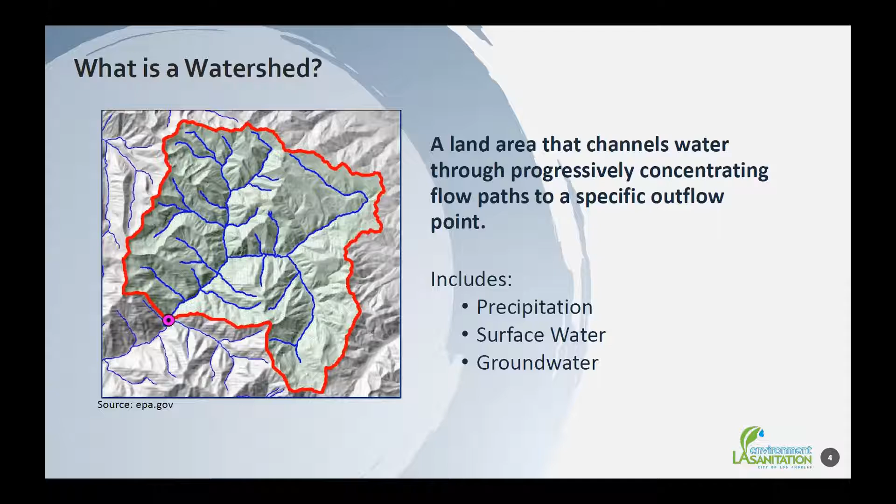Great. So just to take a step back a little bit, since we're talking about watersheds a lot today, I just want to define what a watershed is, just so we're all on the same page. Essentially, it's a land area where all the water within a boundary flows into a final discharge or outflow point, as you see the pink dot on this map. It includes these three components listed here. And this map has actually more rural watershed, where you can pretty easily delineate the boundaries just by looking at the valleys and peaks of the topography. Next slide, please.

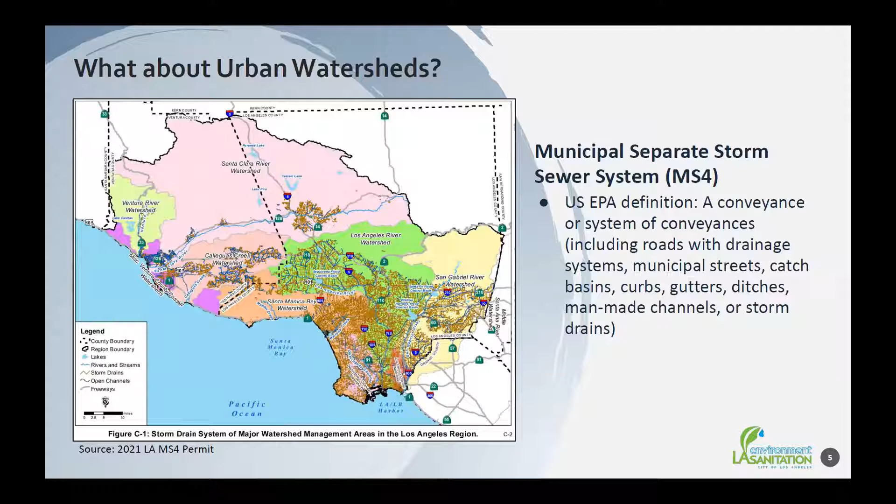So we live in a more urban environment, right? What about urban watersheds? Typically, these are more constructed or engineered conveyances, like a storm drain system, rather than those more natural channels in mountain regions. This is our first key term that's so very widely used in our field, the municipal separate storm sewer system. That's quite a mouthful, and it comes up all the time, so we shorten it to MS4. And the MS4 is essentially a system of conveyances that include all the components listed there to channel stormwater into its final destination. That could be a lake, a river, ocean, into the ground, or even potentially a treatment plant. Next slide.

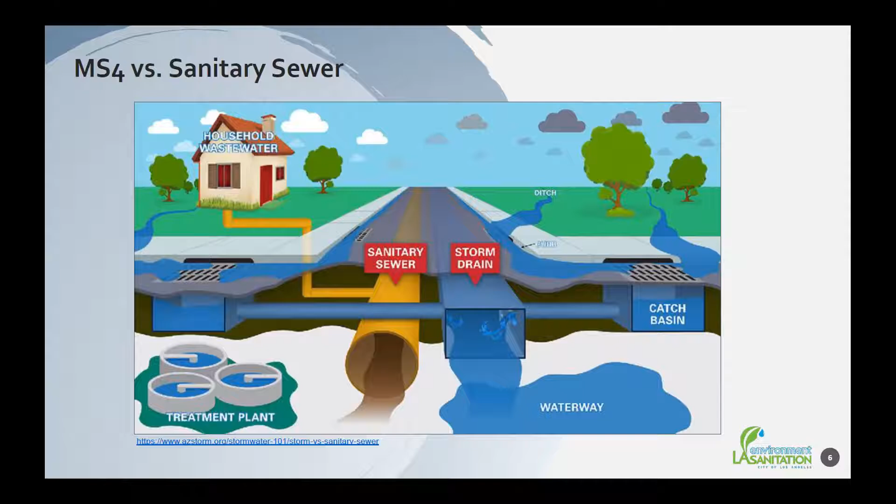So I want to make this distinction between what the MS4 and what the sanitary sewer is. In newer cities, they've actually constructed separate conveyances for wastewater, like what comes from your toilets and your sinks. And there's a separation between that and pure stormwater. And this is important because if you have a combined sewer and storm drain system like in older cities, then it could potentially overwhelm downstream treatment plants when it rains and require discharge of that raw wastewater and stormwater mixture into a water body. So nowadays we separate these to prevent that from happening. A lot of our storm drain systems lead directly into the ocean, and that's why we need to carefully assess pollution in our MS4 and figure out what we can do to reduce it. Next slide.

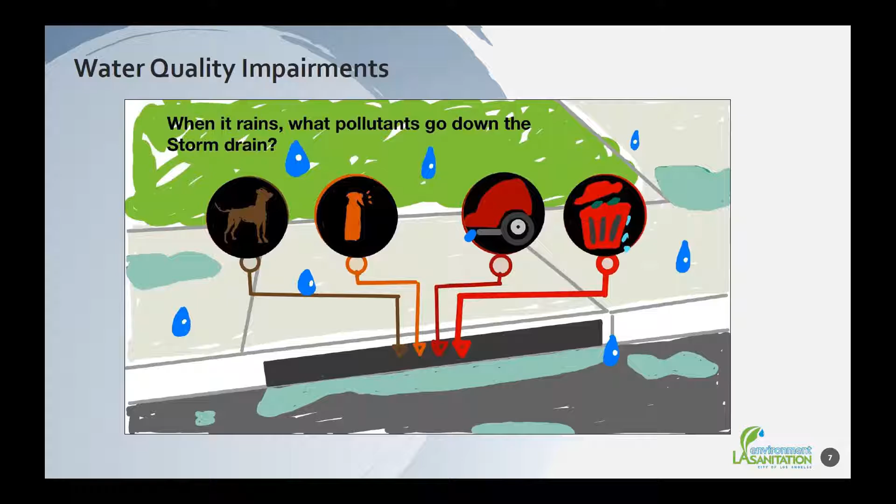Cars, as I'm sure you're all aware, produce a lot of pollutants, such as combustion products that can be deposited onto roadways. Leaking oil is a problem. Zinc comes from tire wear, copper comes from brake pads. And lastly, trash is one of the first pollutants to be regulated closely, and that drove a lot of the water quality regulations for these other pollutants. Next slide.

So now let's talk about the regulations, since they're very important. They govern everything we do here. Some of you may have heard of the Clean Water Act. This is a federal law that governs surface water quality all across the US. The Clean Water Act allows states to enforce regulations, and one of the tools they use to enforce is called the National Pollutant Discharge Elimination System Permit, or NPDES, another long acronym, comes up all the time.

These permits are issued to anyone who wants to discharge water into a water body, and they always come with limits on the discharge amount and limits on pollutants. So the city is subject to one for its MS4 because the MS4 is within our jurisdiction. So we're responsible for meeting those water quality limits. My division's main focus is to comply with this permit, and it's quite a doozy. It's over 800 pages long.

Unfortunately, it's not as fun to read as the latest George R. R. Martin novel, but we have an electronic copy that we can search for the specific sections we need to reference. And we're currently working to implement new permit requirements that came out last year. Next slide.

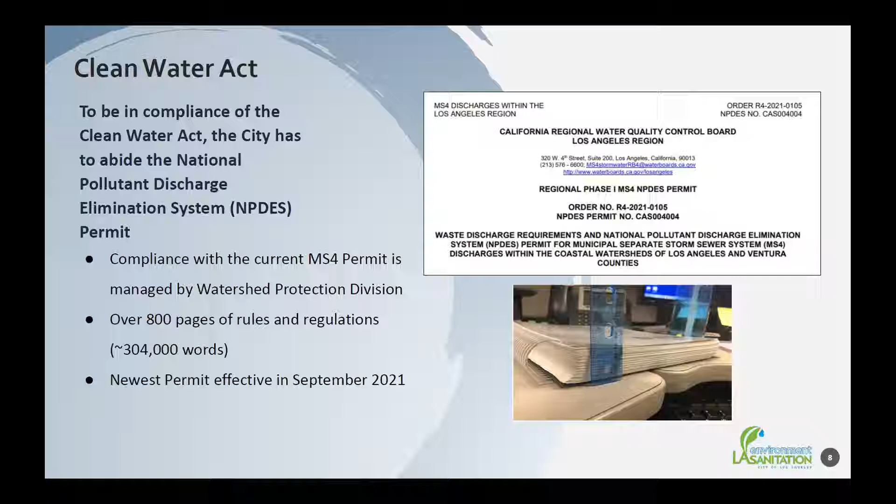So just a little bit of the benefits or the functions of my division. Overall, our goal is to protect the beneficial uses of the receiving waters in the cities, lakes, rivers, and beaches. So we do this by improving water quality, capturing rainwater for other uses like irrigation, non-potable, non-drinking water uses, recharging groundwater. Since a good amount of our drinking water comes from groundwater, it's important to keep our aquifers at a fairly constant volume. Reducing flooding is a big one, since protecting public safety and property is always your #1 priority as an engineer. Enhancing wildlife and providing open spaces for habitats is key.

When we build our cities, we want to think green and reduce impermeable surfaces like roads, parking lots, and rooftops. A lot of our projects are also called multi-benefit, since they improve community aspects like designing new parks while also reducing pollutants in our watersheds. So using this approach, it could be a win-win for our community and for our regulatory requirements. Next slide.

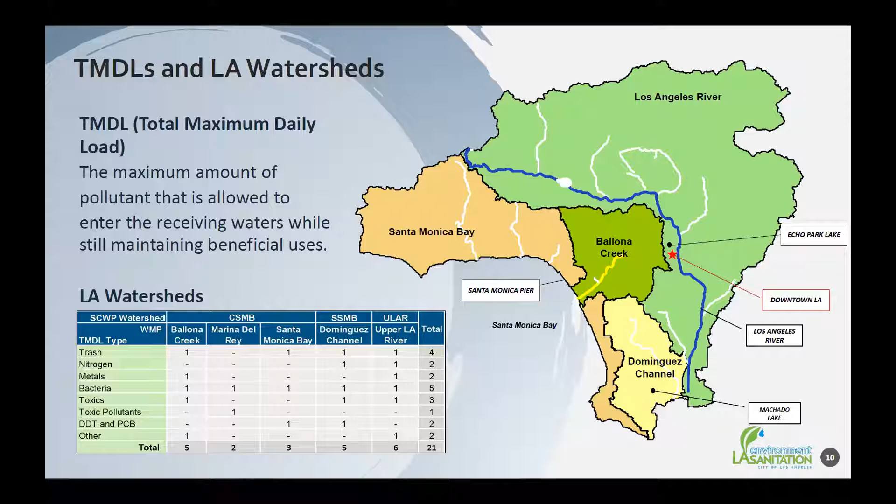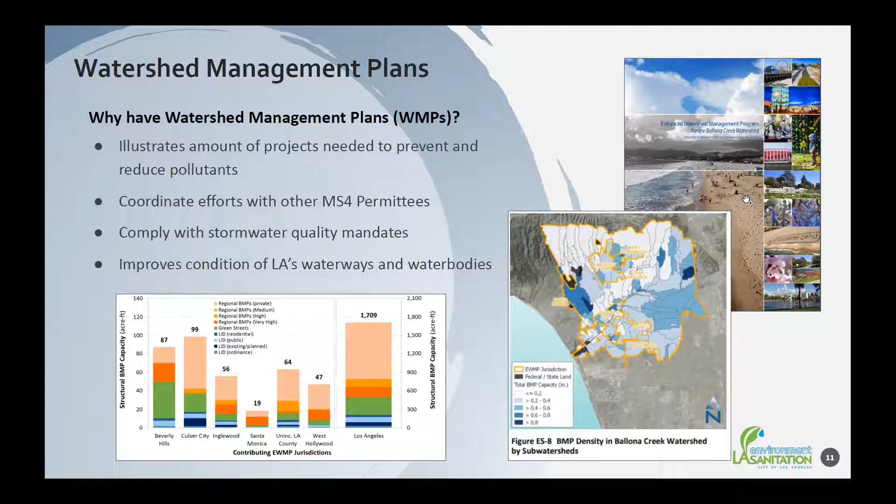Since there's a lot of different cities in each watershed boundary, as you can imagine, we have these plans in place to coordinate efforts with other cities and agencies, since they're also on the hook to comply with the MS4 permit. We typically pool funding and resources from these other cities to work on these projects. For instance, one of my main roles is to lead a watershed management group for the Santa Monica Bay watershed. We're made up of several different cities and LA County as well, and we have a well-rounded team that works together on compliance efforts. Next slide.

So just a high-level breakdown of the strategies we use to comply with these regulations. It starts with coordination and integration, working with many different groups like other agencies, NGOs, which is non-governmental organizations, as well as community organizations. And this includes looking for different funding sources, planning projects in the initial stages. And when we actually build or implement projects, they're classified in different levels, starting with the smallest parcel level. And the biggest level would be the watershed level, which is designed to collect runoff from a much larger area

for treatment. We work very closely with Brett's division in this process, Safe Clean Water implementation, to actually build and implement these projects. And then there's that multi-benefit aspect that I mentioned that is used to improve water quality supply as well as benefiting our communities. Next slide.

So low impact development, just wanted to touch on this a bit since it's another good solid strategy that the city uses to improve stormwater quality and reduce runoff volumes post-development. So when a developer wants to build something new in the city, they need to create an LID plan that shows how they're managing the stormwater runoff on that new property. And our engineers will review that against the city's ordinances and MS4 permit requirements. So if you're the kind of engineer that enjoys checking plans, this would be a very good fit for you.

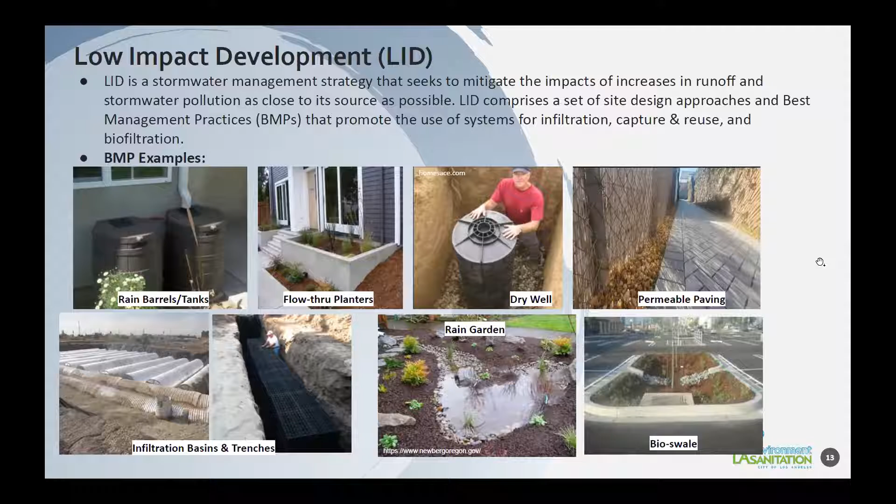So just a little bit more about the sections in my division that support all the work that we do, starting with pollution assessment. This is the section I've mostly been involved with during my city tenure. Our objective is to monitor all the city's watersheds that I showed earlier. So we measure pollutant concentrations, flow rates, and other parameters in the MS4 to build robust data sets and check the health of our watersheds.

Next, we have enforcement, and these are mostly comprised of inspection officers and law enforcement officers that investigate potential environmental crimes. So a lot of the times, if we see any illegal dumping of trash or other chemicals like paint, oil, et cetera, into the MS4, the first thing we would do is notify them, and then they would go pursue any potential investigation and do source tracking as well of some sort of pollution.

Last but not least is our public education section, and their job is to teach residents about living more sustainably. Since everyone lives in a watershed, we're all responsible for doing our part in protecting them. Next slide, please.

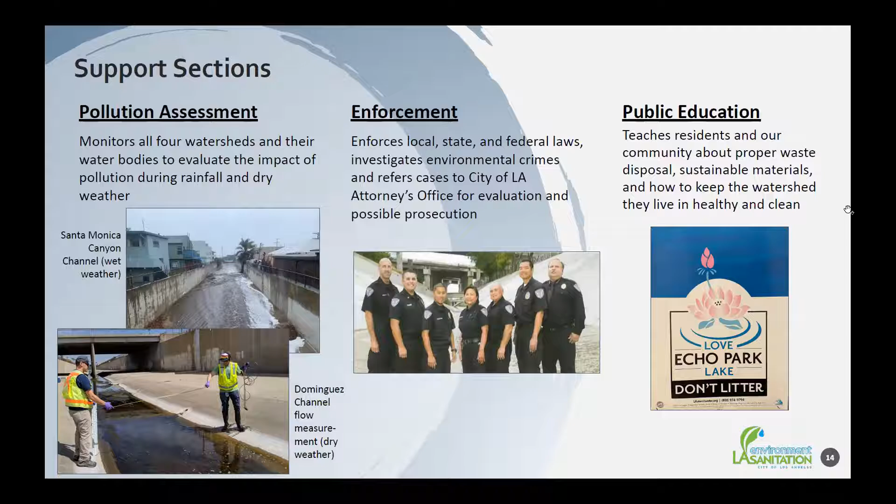Okay, the last thing I wanted to touch on briefly, if our work interests you, feel free to visit our website, lastormh2o.org. It's an easy to remember URL. We released this website this year in partnership with 28 other cities and agencies to raise public awareness about our work. So there you can find out more details about how we protect our watersheds, since this short presentation can't really cover everything, unfortunately.

So that's all for my division and my type of work, and I'll now hand it off to Brett to discuss his division.

Thank you, Richard. That's an awesome insight into your division and a great foundation of all of these different core concepts in watershed protection. So as we've said many times, I'm from the Safe Clean Water Implementation Division. It's actually LA Sanitation Environment's latest and newest division. Every one of our staff, at least the continuing staff, came from watershed protection. So we have all of the DNA that Richard just went through and brought that into our new division to meet our new goals. So let's go ahead and dive in and see what this new program is.

So I'm actually gonna tie back to what Richard was discussing. The Safe Clean Water Implementation Program and Division really are born from watershed protection, the MS4 permit, TMDLs, and the watershed management programs. So Richard has already discussed this, but we got our most recent MS4 permit in 2021. We are subject to 22 different TMDLs and are partners in 6 different watershed management program groups.

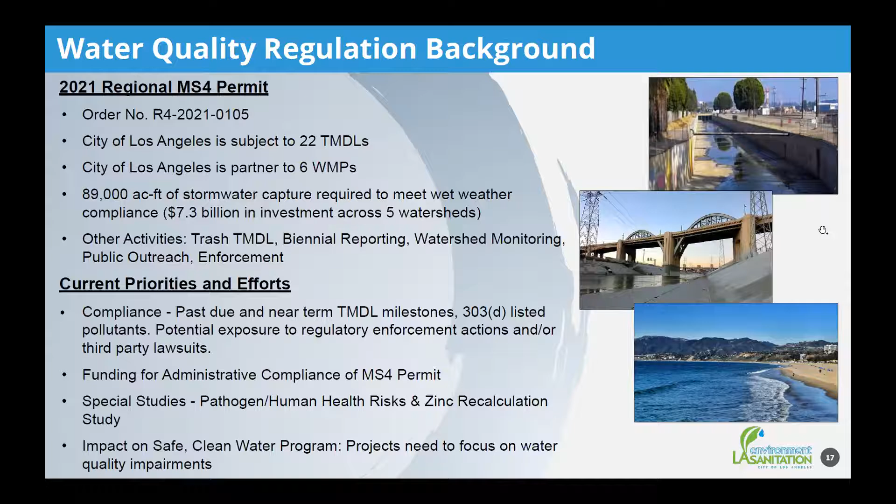And a lot of our work goes into prioritizing what areas and what projects deliver the most benefits that we can with the resources available to us. So we do steer the Safe Clean Water implementation program in order to meet the various priorities that are identified by Richard and his team. And there also are numerous different nuances that we're trying to meet, but we can now focus a little bit more on what the Safe Clean Water program itself is.

So it was advertised as Measure W, and it was approved by a general election in LA County in late 2018. It actually needed 2/3 approval to pass, and it exceeded that with 69% yes votes. That was a great vote of confidence from the residents of LA County and emphasis that this should be a priority for the region. And it then took about 6 months, half a year, for the LA County Board of Supervisors to officially approve the ordinance and all of the language and details of how this program would be rolled out and administered.

So our first tax collection was in fiscal year 19-20, and every single year throughout LA County, this program brings in about $300 million that goes to water quality and the additional water supply and community investment benefits that the program emphasizes. So that $300 million a year is split into a few different buckets, just because that's such a vast amount of money. The county flood control district actually keeps 10%, and that helps them run all the administration, reporting, tax collection, all of the behind the scenes support efforts.

And then in terms of the actual water quality benefits, 40% of the funds are returned throughout LA County to each individual city in which that tax was collected. So let's just say the city of Los Angeles contributed $1, we would get back 40 cents in a check. And that now has numerous different requirements and reporting mechanisms that we have to meet, but that is now money that should be put into water quality improvement projects.

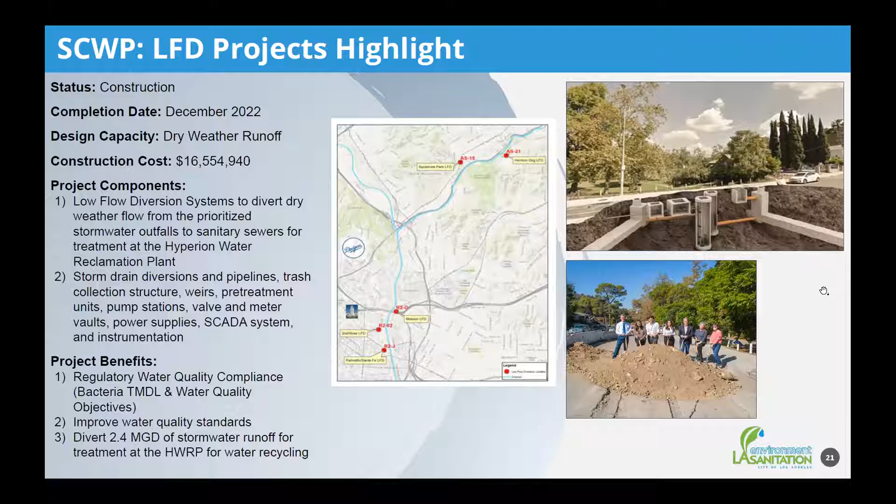And it also provides a new water supply. All that water goes to many of our reclamation plants, and by 2035, all of our reclamation plants should be at 100% water recycling. And so that is a new water supply that is extremely beneficial to the region, as I'm sure you've all heard of the mega drought and climate change moving forward.

So shifting gears, that was a highlight of our municipal program. Now I'd like to discuss our regional program a little bit. This is actually a program that's administered by LA County, and we're actually kind of considered an applicant in order to pursue these grant type funds. And so we basically spend about a year. Looking at the timeline from the left side, it takes about a year for us to develop the feasibility study, which is essentially our application for funding.

It would identify a project location, propose a certain scope, and then go through all the feasibility, what's already there, environmental permitting, and other considerations that are important before we go headlong into developing a project. It then goes through a series of different administrative and technical review steps that are led by the county. And you can see it takes all the way until the following July.

Let's say you apply in July of 2020. You then would get an answer whether or not you would be funded in July of 2021. So then it takes another year or so to get the project delivery mechanisms in place, and then you can truly start design and construction. So these do have long timelines.

But every project that is funded is vetted through a scoring review. This is a panel of technical experts from various backgrounds, and they review that your project will meet the water quality, water supply, community investment, nature-based solutions, community support, and leveraged funding goals that the program is emphasizing. You can get up to 110 points, and you need to receive at least 60 to be considered viable. And the higher score you have, of course, the more competitive your project is.

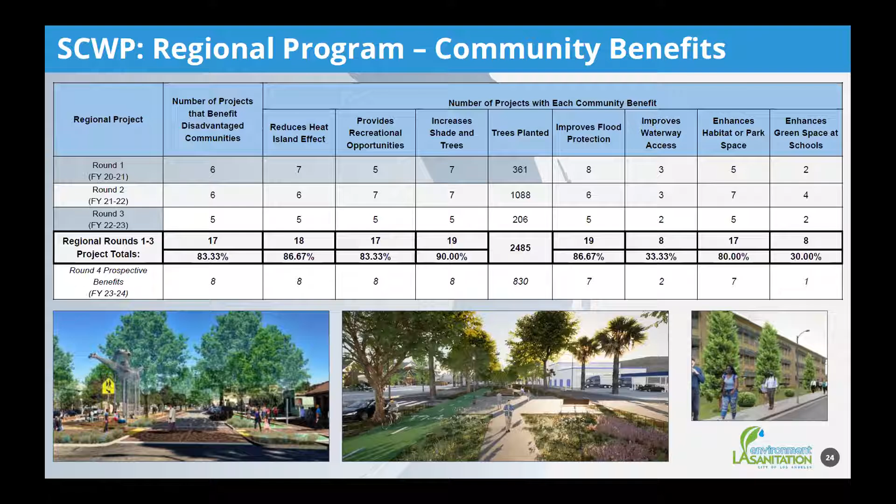19 other projects improve flood protection, 8 increase access to waterways and green spaces for our highly urbanized environment, 17 enhance habitat and park space, and 8 are directly adjacent to schools and deliver project benefits to schools. Below here, you can see renderings for a few of our funded projects that illustrate the types of benefits and greening that will be delivered. And that's not even to mention the water quality benefits each of these projects is designed to deliver. So we're killing two birds with one stone in meeting our water quality requirements and bringing water supply and community investment to the city of Los Angeles.

I did want to highlight 2 of our projects that are funded in the regional program. The first one would be the MacArthur Lake Rehabilitation Project. It's currently in the design phase and is scheduled to be completed in late 2025. It has a design capacity of approximately 4 million gallons per day that will be treated, and a total cost of about 20 million. You can see an overview of how closely this lake is located to downtown LA. And there's a brief schematic that shows the basic diversion from the stormwater structure, the pre-treatment facilities, a couple of different bioswales, and water entering the lake.

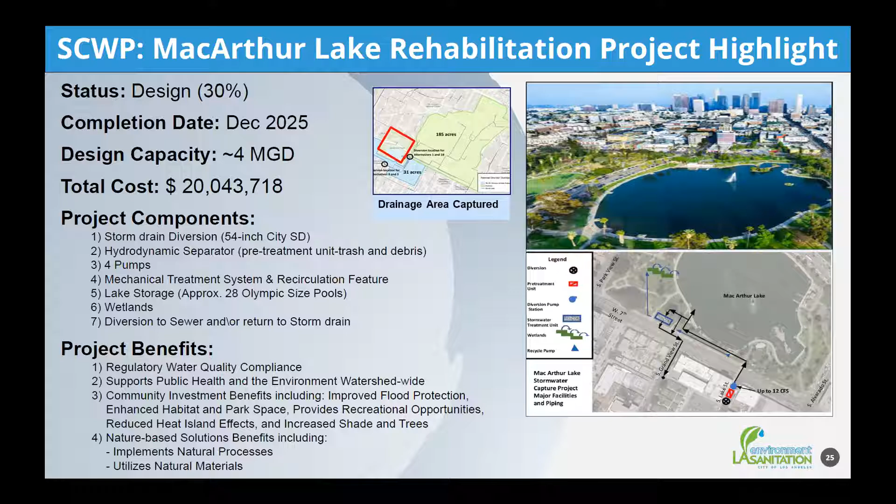Project benefits, of course, are regulatory water quality compliance, supporting public health and the environment watershed wide, and bringing community investment benefits. Many of the ones on that previous table apply for MacArthur Lake. And a great thing about MacArthur Lake is it is implementing nature-based solutions, which is always a priority, using natural processes and materials to mimic what was there before we built out the city. There was a natural watershed that had fewer pollutants and natural processes to hold, slow down, and treat the water. And now we need to mimic that after we've built out such an impervious city with lots of concrete.

Another project that's really important to highlight, this is leaning more towards the gray infrastructure. It could almost be considered its own water reclamation plant in some ways. And this is the Ballona Creek TMDL project, or Total Maximum Daily Load project. This is an absolutely massive project that just started construction. It's also supposed to be completed in the middle of 2025.

It has a design capacity of up to 29 million gallons per day and has a large construction cost of $76 million. So this is actually made up of 2 different regional facilities. You can see them on the right side, LFTF1, low flow treatment facility number 1, and LFTF number 2, and their locations are on the map. You can see the Santa Monica Bay. It's just barely in that bottom left corner, and Ballona Creek flows towards the bay right next to Marina del Rey. So you're in the Santa Monica beaches and bay area.

So this is a huge project that will really, really help us during dry weather. It'll help us meet our compliance goals for 330 days of the year because it's designed for dry weather. It'll also support public health and the environment watershed wide. There are Ballona Creek wetlands and a Ballona Creek estuary that all will receive purified water flows from this project.

In addition, it is estimated to generate an additional 5,000 acre feet every year that will be diverted to Hyperion and used for water recycling. So that's an absolutely massive water supply that would otherwise just flow right into the ocean that the city is able to capture, treat, and recycle.

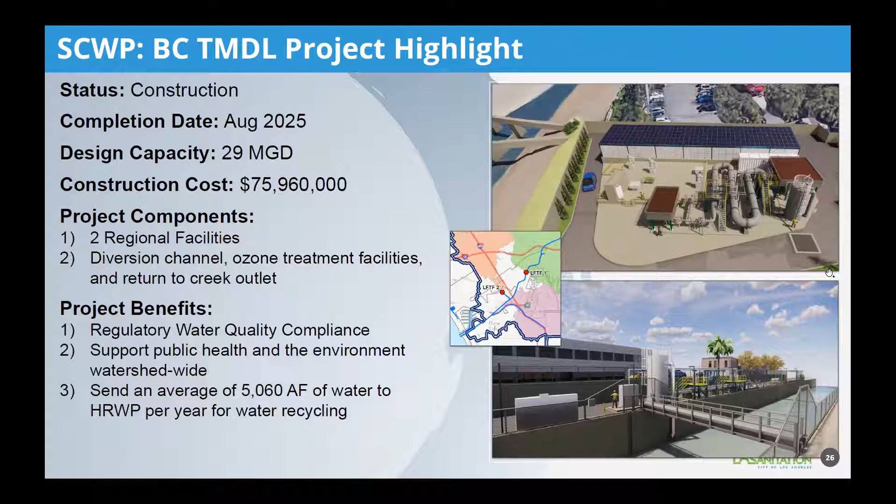So next steps, the Safe Clean Water implementation division is the newest division in LA San. So we are still working on setting up shop and ironing out project delivery processes, organizing staff, and setting up new administrative systems, because this is an unprecedented amount of funding coming towards watershed protection and water quality goals. As I mentioned at the beginning, there's billions of dollars of need, and the Safe Clean Water program allows us to actually start taking significant bites at that goal.